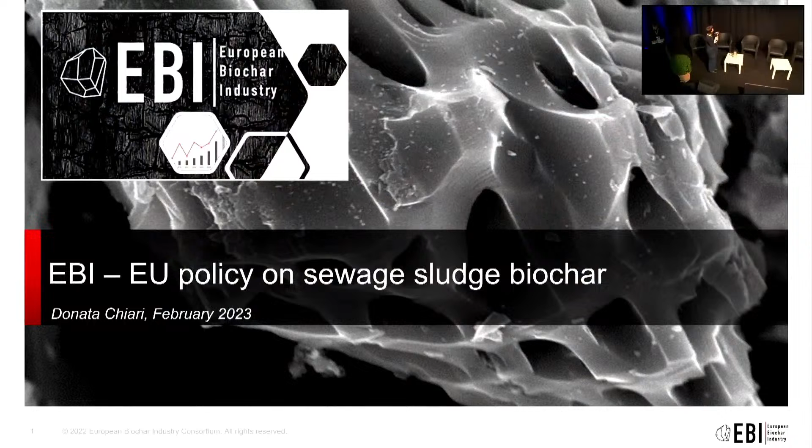So EBI has typically four pillars of activities: market intelligence, communication, industry standards, and policy. Policy arises as a key aspect for EBI work, and this focus on policy work is really to support the presence of biochar in the European policy framework.

Specifically today, of course, I'm going to talk about sewage sludge biochar, because one of our goals is to see this feedstock included for biochar in EU policies and initiatives. This is, of course, a waste stream that has been more and more discussed for its great value, and now it's one of the central themes of the EBI work on policy.

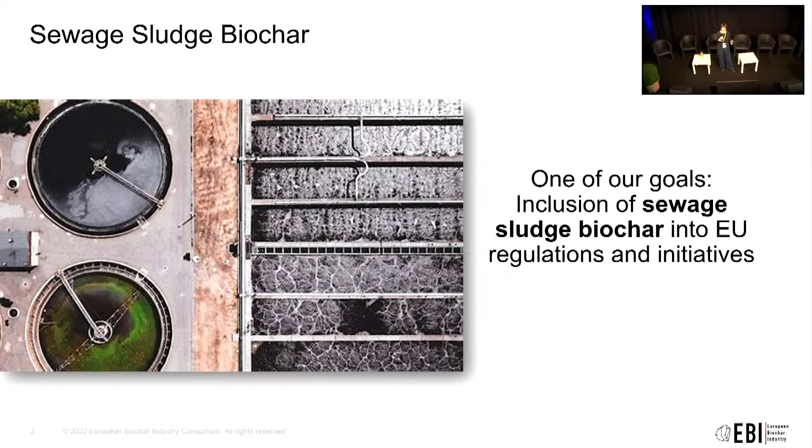So a little bit of background, what we already have on the table. When it comes to sewage sludge as a feedstock for biochar, we can count on many achievements. First of all, the scientific basis: literature and research from all over the world have been developing rapidly during the last years. And this also thanks to the high technology readiness level.

I don't know why it insists. It just wants me to get over this.

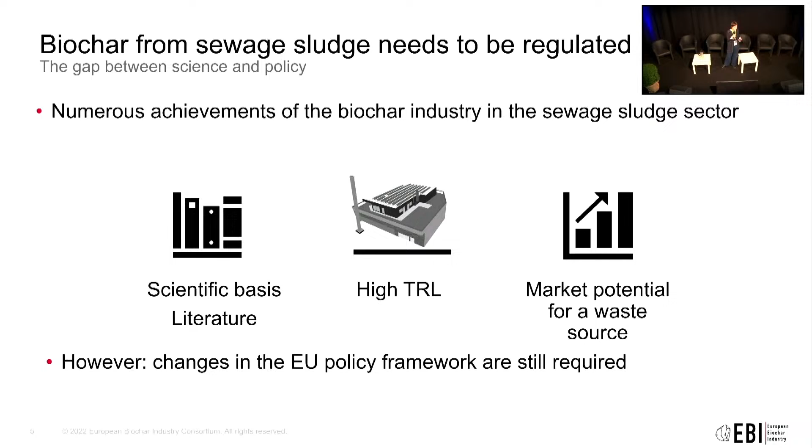And so also thanks to this high technology readiness level, we already have the market potential for a concerning waste source all over the world. But how European policies and initiatives will reflect this potential is still blurred. And this is where the EBI takes action.

So not everything, of course, is bad. We want to remind you that last year the Fertilizing Products Regulation included biochar into CMC 14, and different member state regulations are allowing sewage sludge biochar for land application. And also non-plant-based biochars are being discussed for a regulated land use.

So even though sewage sludge is not included in the positive list of feedstock for biochar, the discussion is definitely open. And the surrounding policies in the European Union are changing, talking about agriculture, nutrients, and urban wastewater treatment. We are really seeing the landscape changing, and this opens new opportunities and new space for intervention for biochar from sewage sludge.

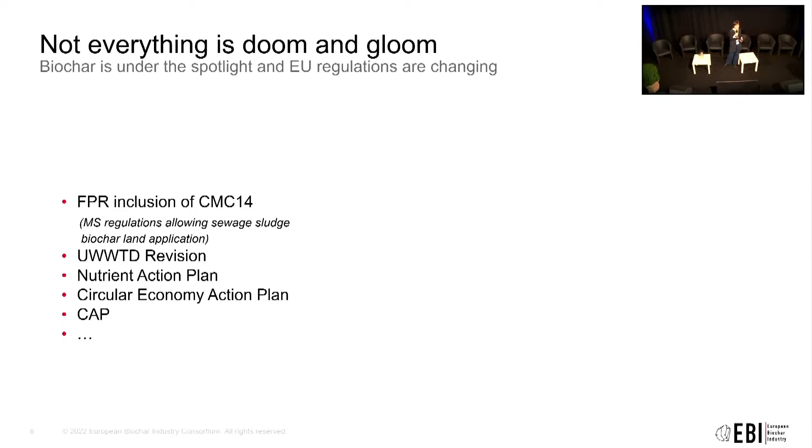So here I'm going to present very quickly some of the EBI activities. Our key word, of course, is cooperation. We collaborate with scientific institutes and universities. We continuously interact with our members through, for example, working groups. And we can count on cooperation with other platforms such as the European Sustainable Phosphorus Platform, which has been advocating for phosphorus recovery for many years now at the European level.

So, talking about our activities, we just released on the 31st of January of this year the position paper on...

This is really... okay, let's see if it's just my movement.

So here we have the updated position paper on sewage sludge biochar. This is a product of our working group on sewage sludge carbonization, and our call was specifically on the inclusion of biochar from sewage sludge into the FPR.

The main concern of the JRC when they published their evaluation was the safety of biochar, so pollutant removal. That's why this position paper, which you can download with the QR code before it changes again, summarizes some of the most recent literature on pollutant removal in sewage sludge biochar.

It also covers sewage sludge biochar properties as a P-fertilizer and as a carbon removal solution. You can find it here or on our website.

Lastly, I'd like to remind you how much the EBI is counting on communication to change the European policy framework, because communication and interaction with people leads to change, and policymakers need to know what is already there with biochar from sewage sludge and biochar in general. The more we tell this story about what is both a solution to many issues and a source of value for Europe, the more it will be heard.

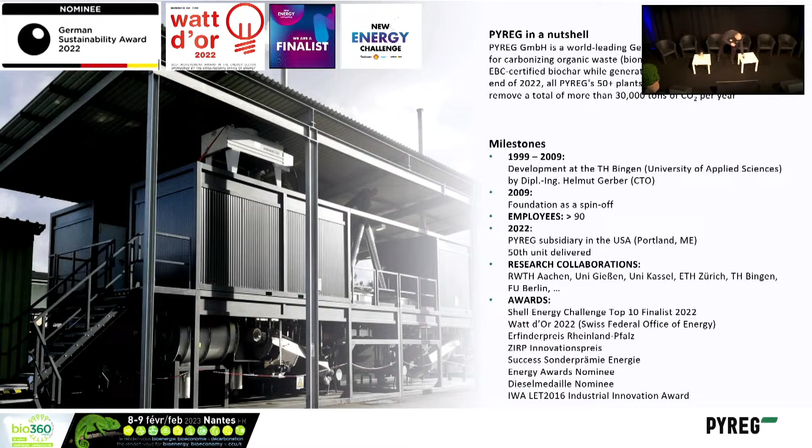Yeah, thank you, Harald. After just falling off the stage... Very short introduction into Pyreg. Let's try this. No...

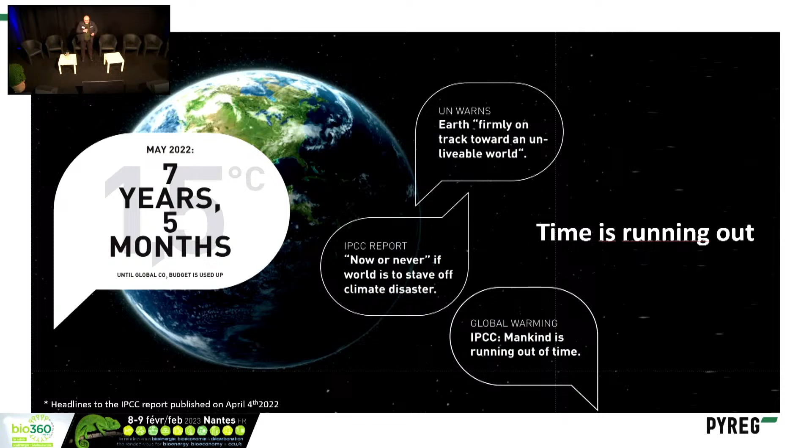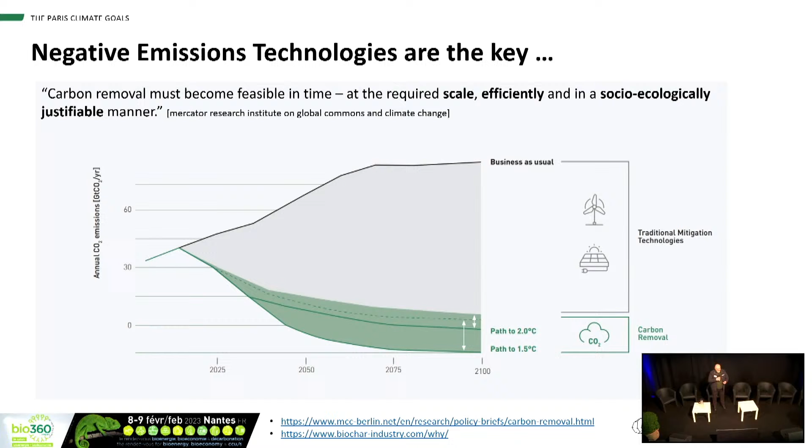I personally started in 1999 with gasification, switched to pyrolysis in 2003, did a lot of research at the university, and founded Pyreg out of this research project in 2009. We are almost 100 employees now, building machines on 3 continents. I think this is common knowledge: everyone knows we need carbon negative technologies to save carbon dioxide emissions by not burning fossil fuels. To reach the path to 1.5 degrees or even 2 degrees, we need carbon negative technologies, and biochar is one of them. There's direct air capture and so on, but biochar is now, in the last few years, accepted by the IPCC panel as carbon negative, and that's the area we work in.

The effect is the following: you have photosynthesis, so plants capture carbon dioxide, which becomes part of the plant as carbon. If you don't burn the plant but put it into a pyrolysis plant - any pyrolysis plant, not just a Pyreg plant - you create carbon. This carbon is very stable, permanent in the soil, and we'll hear more about this from Paal later, about the persistence of carbon in the soil. It's stable for more than 1,000 years. You can use it as a soil conditioner, or in building materials like concrete, where it's also obviously stable.

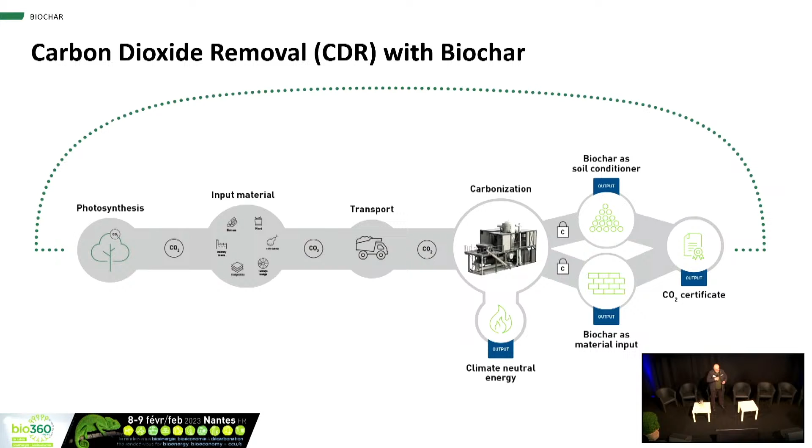If the material is used in soil, there are side effects related to carbon dioxide removal. This is a meta study led by Hans-Peter Schmidt, Claudia Kammann, and others, who reviewed 26 other studies - so this represents the grand mean of these studies. You can see there are many areas where biochar helps in soil, like crop yield, water use efficiency, and water holding capacity, plus some effects like nitrogen leaching. It's a very good material, traditionally used in soils to help poor soils achieve better yield.

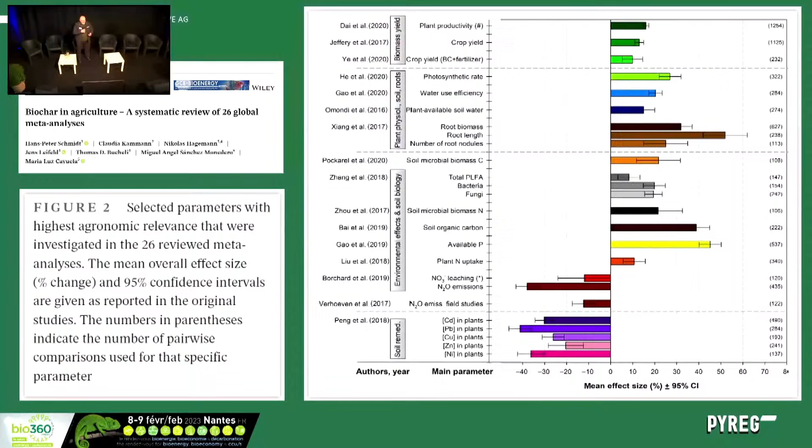Not all biochars are equal. You can change the biochar by changing the type, the temperature, time, residence time, and so on. And it's important, as was shown by EBI before, there are some parameters which are important to get results out of it.

If we switch to sewage sludge, the question is why sewage sludge? At the moment it's widely used in Europe for agriculture because of the phosphorus content. The reason is there will be a peak of phosphorus. Different studies talk about it being reached in the next 10 years, maybe by 2050, but there will be a peak of phosphorus production. And phosphorus sources are not endless, so we have to care about reusing and recycling it.

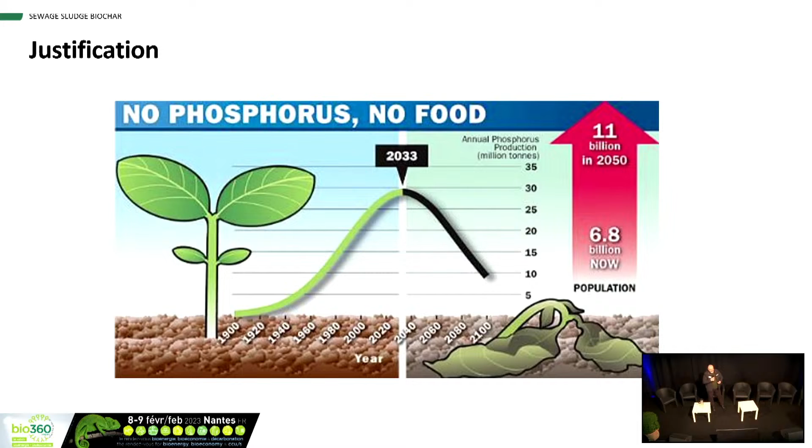You can already see the prices are going up. This is something I extracted from the internet: the phosphorus rock price from Morocco is just going up all the time. The reason is that the rest of this phosphorus can only be sourced in countries where, for political reasons, it's not really easy to get your hands on it. So we have to reuse and recycle phosphorus.

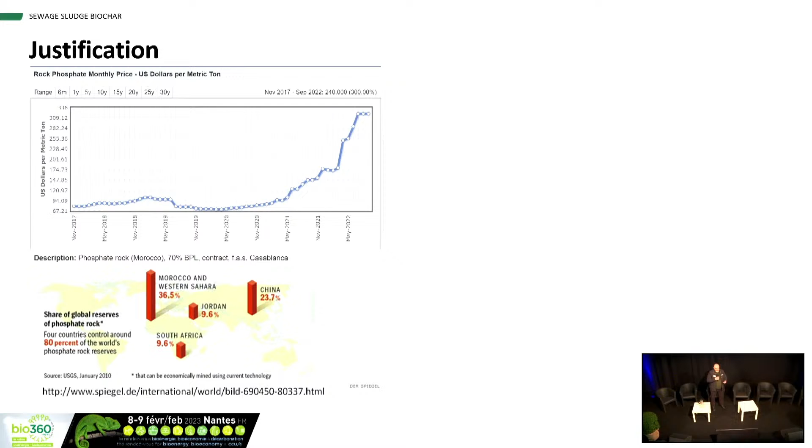If you put sewage sludge directly on the field, it may contain organic pollutants, microplastics, and so on, and that's maybe not the best way. I can show you that sewage sludge biochar may be one solution to make a better phosphorus product out of the sewage sludge.

This is the quality of sewage sludge in Germany, and I think it's the same in France and other European countries. Every time the question is about pollution, heavy metals are the main concern. We can see that heavy metals have been heavily reduced over the last 20 to 30 years in German sewage sludges. If we pick one contamination, that's cadmium.

If you compare the cadmium contamination between sewage sludge and phosphate rock from different countries, you can see sewage sludge contains around 1 milligram of cadmium per kilogram, while phosphate rock clearly contains more heavy metals. So the concern about heavy metals applied to sewage sludge alone isn't really fair, because alternatives contain more cadmium. So it's a good idea to use it — not the cadmium, but the sewage sludge.

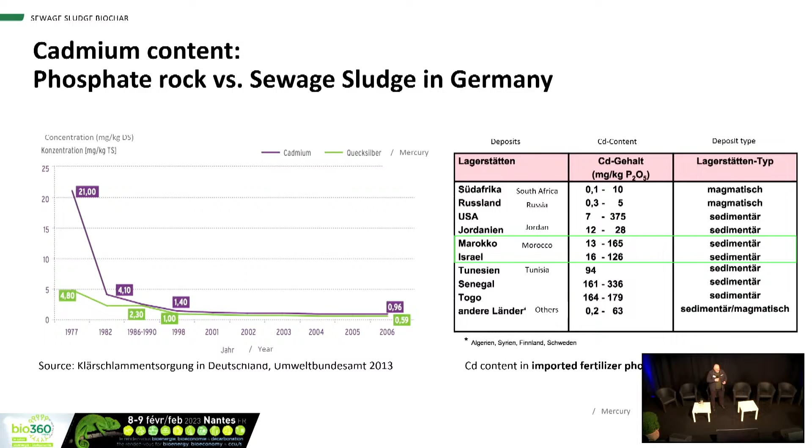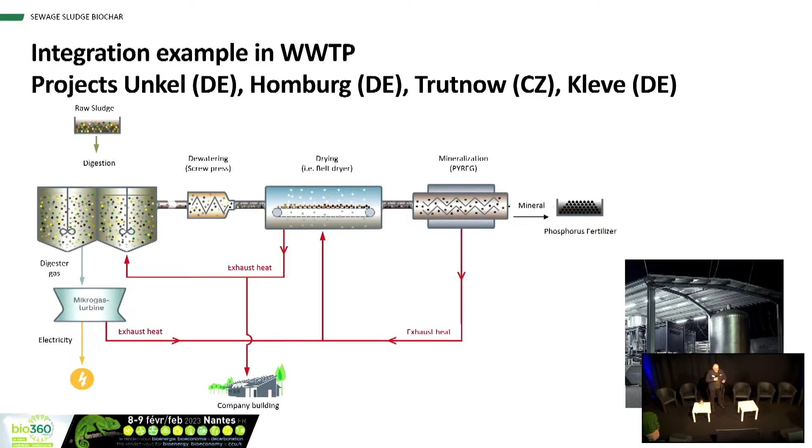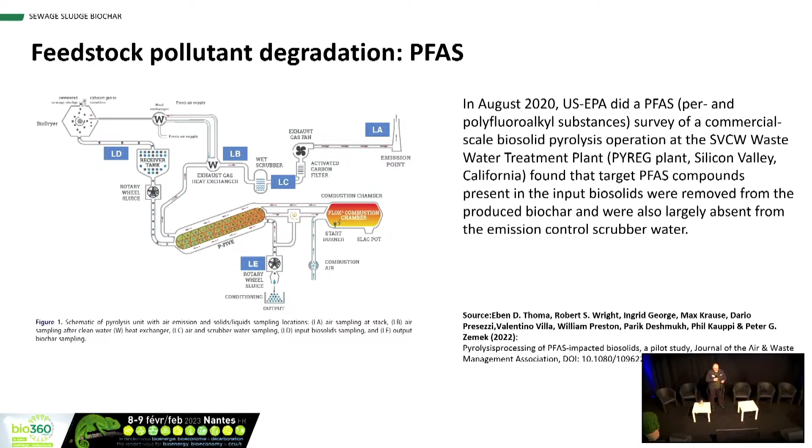Coming to pollutants, one important topic is PFAS — the per- and polyfluoroalkyl substances, a difficult word. We did research with our clients, mainly in the US, in Silicon Valley, at a wastewater treatment plant which runs a Pyreg. They were able to show that almost everything is gone. We'll also see new results from WOW, which Paal will show you later, showing that more than 90% of the PFAS is gone. It's not in the biochar, it's not in the exhaust gas — it's just converted to its elemental composition.

Then we have the PAHs. We did some research on PAH reduction with polluted biomass. We had a biomass which contained 5,300 milligrams of EPA 16 PAH, so highly polluted biomass. Put it into the machine, and we were able to reduce it to 1% of the initial PAH content. So you can clearly see that pyrolysis, if done right, does not create PAHs. It can reduce PAHs by converting them to elemental carbon and hydrocarbons, which are burned in a combustion chamber.

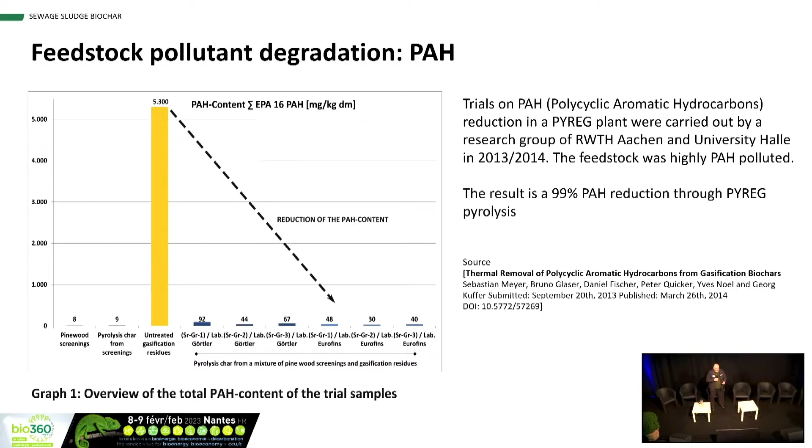Then we also did research together with the German EPA, the Umweltbundesamt, about pharmaceuticals. The research was done at a full-scale plant in Germany, in Unkel, 2019. And they were able to clearly show that all these pharmaceuticals were gone. They proved that they're in the sewage sludge, they're everywhere. But when the material enters the pyrolysis, the temperatures and the time just destroy these pharmaceuticals.

We also did research on dioxin. We took dioxin polluted biomass from the riverbanks of the river Elbe. This was former Eastern Germany. The soil there in the banks of the river is highly polluted with dioxin, and the biomass also. We took this biomass, which had a soil pollution about 250 nanograms per kilogram, and the dioxin after pyrolysis was reduced by 95%. Also for the same reason: treatment with temperature and time. This organic pollutant is destroyed.

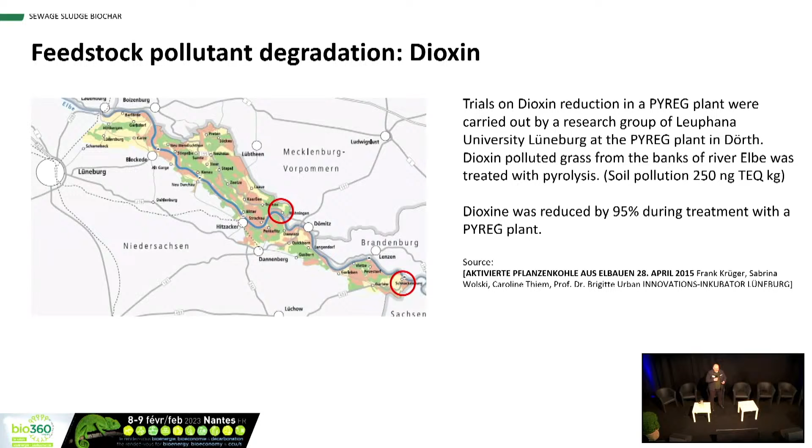Then we have again the topic cadmium, which is also very important. We can see that higher reactor temperatures evaporate the cadmium. So if the temperature is higher than 500 degrees, cadmium will be evaporated in the pyrolysis gas, pass the combustion chamber, and you have to filter it out later with an activated carbon filter, which we do. The problem is usually the higher the temperature gets, the more unavailable the phosphorus gets for the plants.

And this you can see in the columns. We have different temperatures: 500, 600, 700 degrees. And the hotter the phosphorus gets in the pyrolysis, compared to triple superphosphate fertilizers, the lower the availability for the plant is. So there's a trade-off. It's not best to make it as hot as you can, because you lose phosphorus availability. And usually you do not need these high temperatures to get your cadmium content below the limits of the European fertilizer legislation.

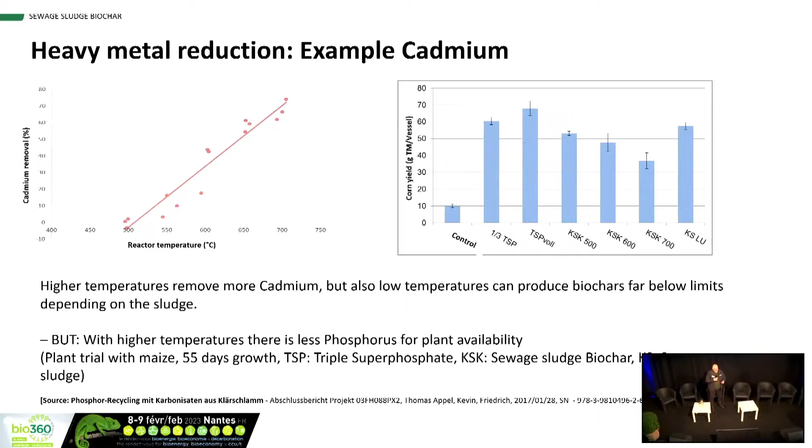The last fertilization trials we did were last year. They were run by the state of Hessen in Germany. You can see that if you compare the carbonisate made from sewage sludge to triple superphosphate, which is the standard for fertilization, it's in the same area. So it's like 90% of the value of the fertilizer you can buy, and the prices are highly different, because fertilizer at the moment sells around 600 euros a ton, and we are talking about a material which you can get almost for free because it's traded as waste.

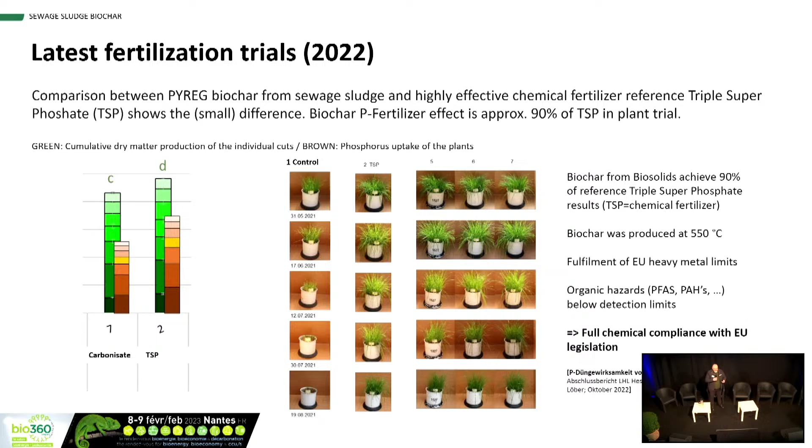My conclusion for sewage sludge biochar, after doing plant trials and so on starting 2008: in no instance did municipal sewage sludge exceed the limits of German fertilizer legislation. It's very easy - if you see the sewage sludge and know the mass conversion of the different materials, and have an analysis of the sewage sludge, you can directly tell people whether it will hold the limits of the fertilizer legislation or not, and in most cases it will hold the limits.

Sewage sludge has a significant phosphate fertilizing effect if the temperature is not too high. In our experience, below 700 degrees and higher than 500 degrees, which is needed to destroy organic pollutants, is a good temperature. And there's the conflict between phosphorus availability and cadmium reduction. So if there is a lot of cadmium in the sludge, you might want a higher temperature, but you have to think about the availability of the phosphate going down.

One thing is very obvious: nitrogen is lost during pyrolysis. Not everything, but up to 60-80% of nitrogen is lost. In some cases this is an advantage because, especially in northern Germany, Netherlands and so on, there are high nitrogen pools and they have problems with nitrogen. The ratio between phosphorus content and heavy metals stays the same. So if you put sewage sludge on a field, or carbonisate on a field, you don't put more heavy metals anywhere.

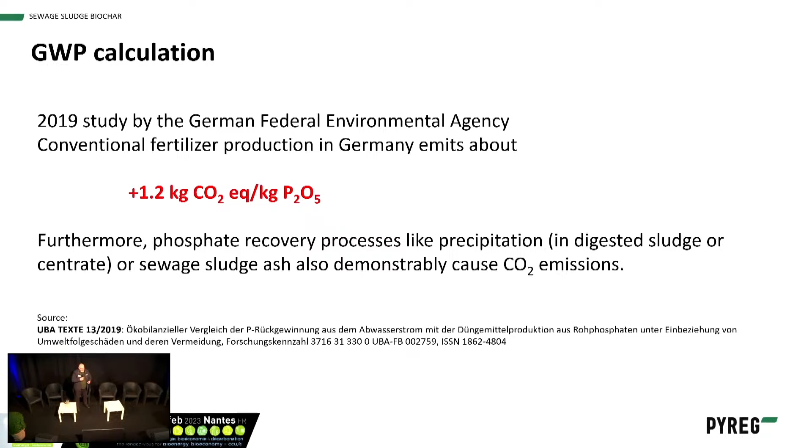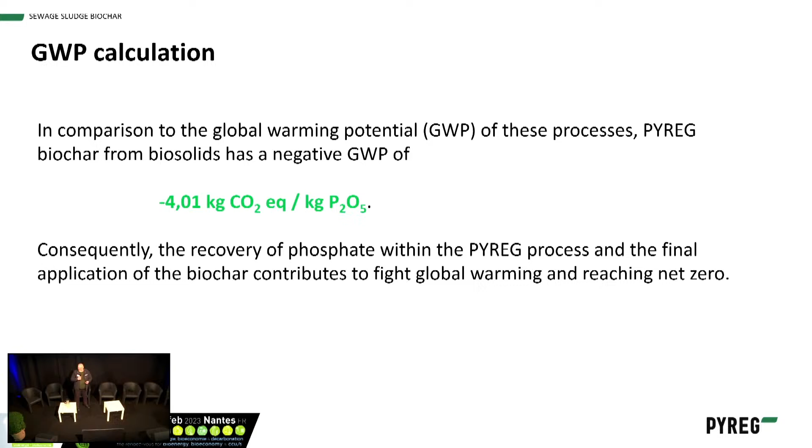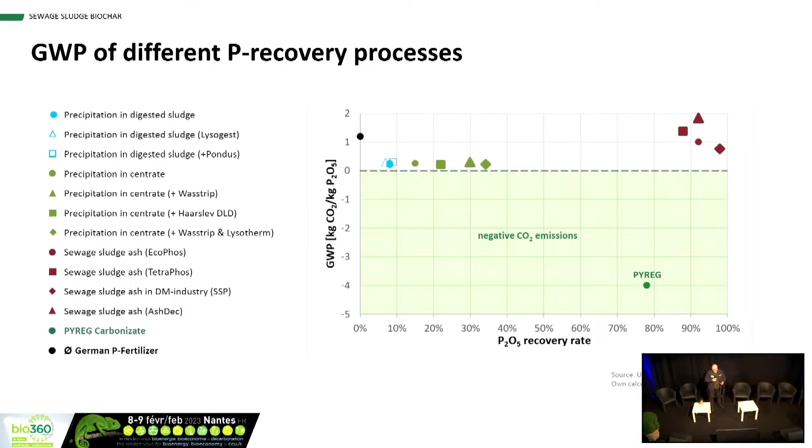I try not to fall off the stage now. There's stairs. As it is all black, we didn't see that there are stairs.

So thanks a lot, Helmut. That was a wonderful presentation. I think it also showed the scope of what we're working on regarding this topic, from elimination of pollutants, because we're using sewage sludge on fields now just as a pure product. So we can handle the problematic issues of it. Through carbonization, we have full chemical compliance with fertilizing products regulations, which I think is interesting, just because it's made from sewage sludge and people don't really get the chemical transformation of this material. It is an issue that has to be discussed quite intensively. And we also saw the carbon balance, which is super attractive.

So we've seen this from one technology now. Now I would like to invite Christian Wied from AquaGreen on stage. They're also here present, and they have a bit newer technology, a more recent tech company, and they're also working on a very interesting system of sewage sludge carbonization. Thank you, Christian. Thank you. So I will focus on PFAS removal and sludge management by our new fully automated sludge drying and pyrolysis system.

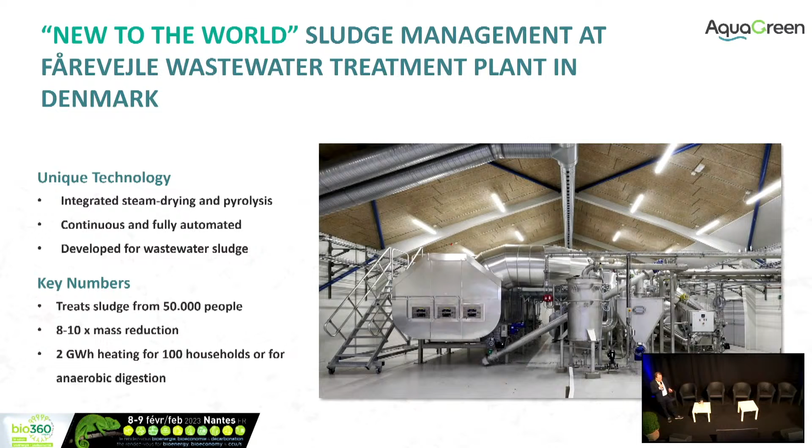The flue gas from the incineration is heating the pyrolysis, and we also use the flue gas for heating the dryer. And in the end, we recover around 70–80% of the heat as hot water because we condense the steam that is generated from the sludge, all in a continuous process. The system is treating sludge from around 50,000 people, so it's very well suited for mid-size wastewater treatment plants. We are not covering million-inhabitant cities, but we are covering roughly 50% of all wastewater treatment plants in Europe. You have an 8 to 10 times mass reduction, so you are saving a lot on sludge handling cost. And with the system here, we are generating 2 gigawatt hours of hot water annually.

Will you turn on the video? So we'll just show a short video from the system in operation in Denmark.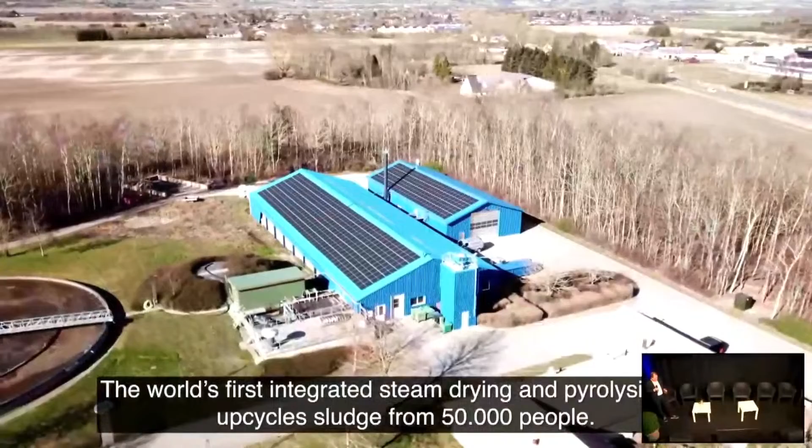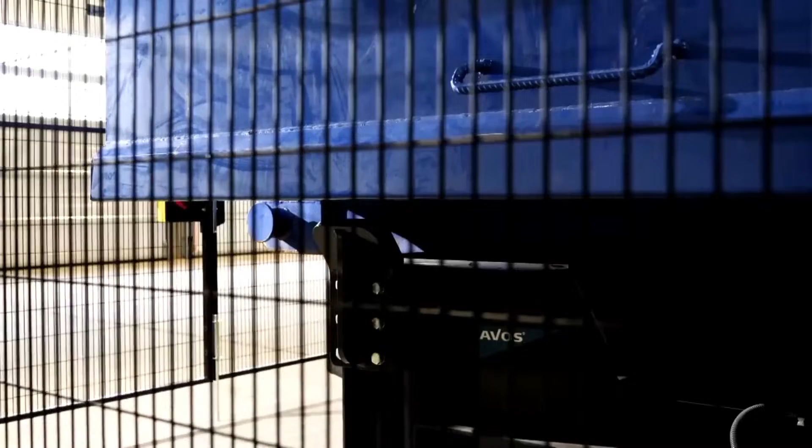Fårevejle wastewater treatment plant is located in beautiful Odsherred, northwest of Copenhagen. The world's first integrated steam drying and pyrolysis plant upcycles sludge from 50,000 people. The plant converts sewage sludge into biochar and district heating. It protects the groundwater as harmful pollutants are removed. The plant protects the climate as biochar captures and stores CO2. The container empties the sludge onto a conveyor.

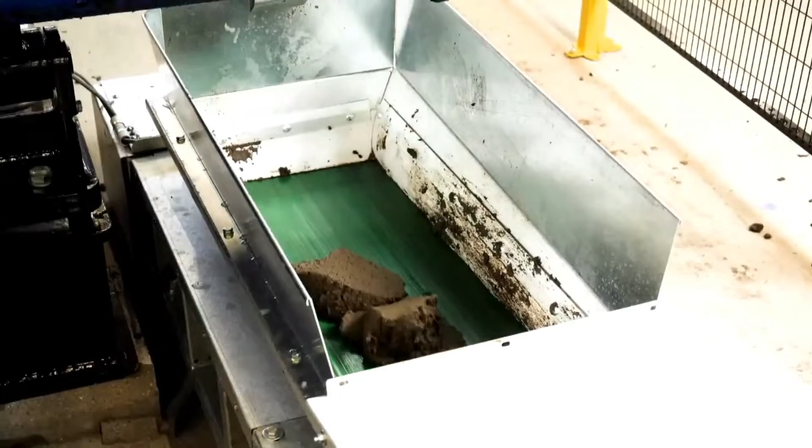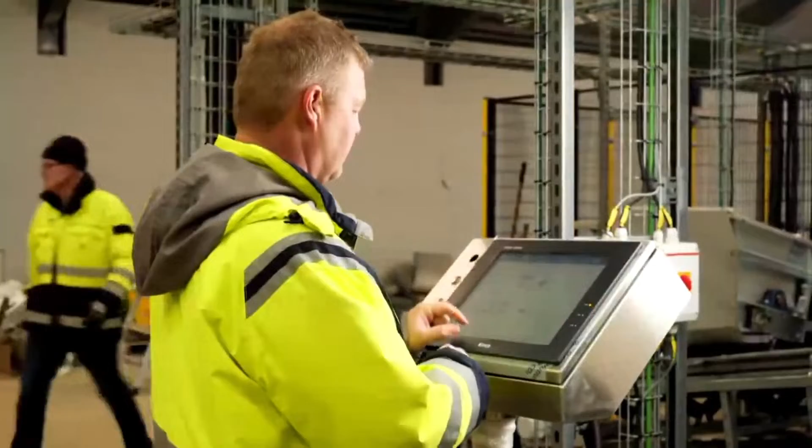The sewage sludge contains 75% water when it is loaded into the steam dryer. After 2 hours, by use of superheated steam at 200 degrees Celsius, nearly all water has evaporated. The dried sludge is conveyed to the pyrolysis in a closed and fully integrated process. The energy from the sludge is regained.

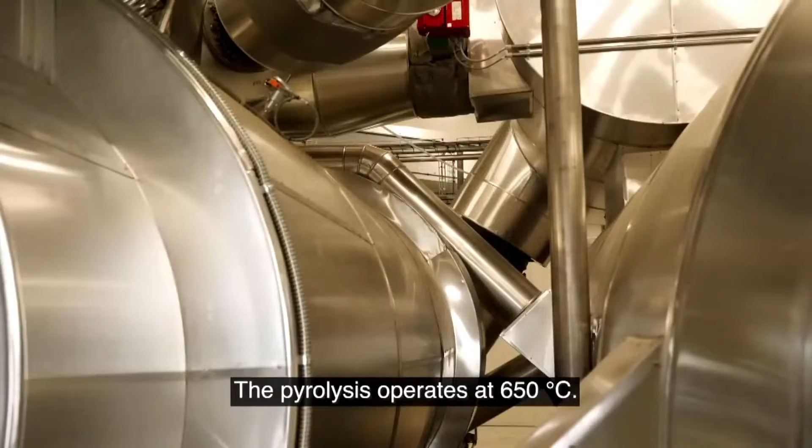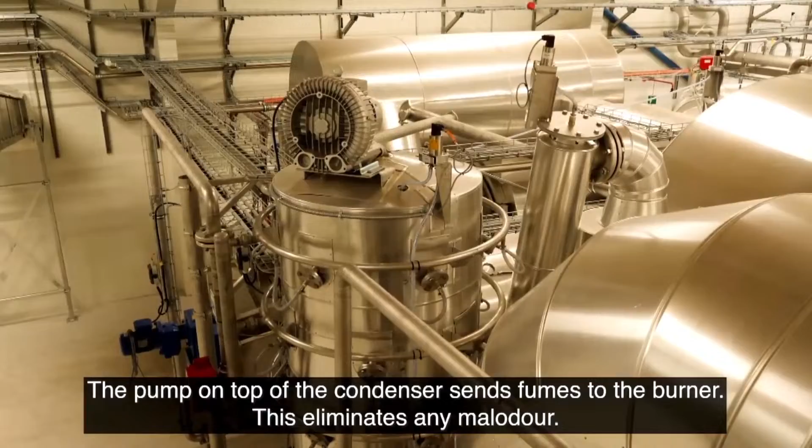First, it is used for the pyrolysis process, then for the steam drying process, and last, for local or district heating. The pyrolysis operates at 650 degrees Celsius. The flue gas is cleaned in a scrubber. The pump on top of the condenser sends fumes to the burner. This eliminates any malodor. In the burner, pyrolysis gases are incinerated at 900 to 1000 degrees Celsius.

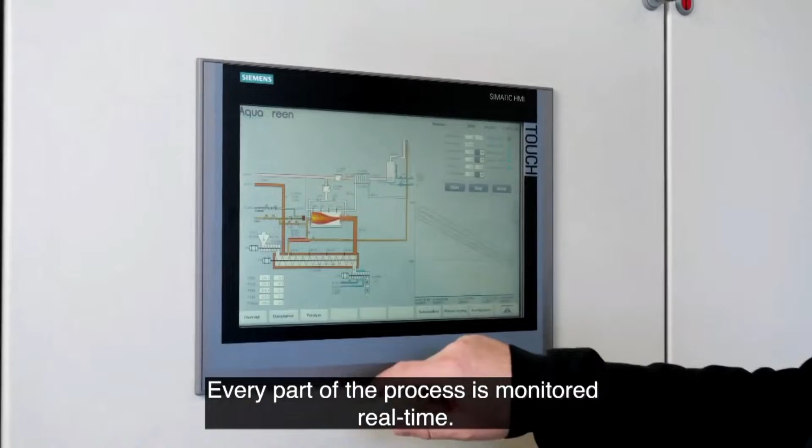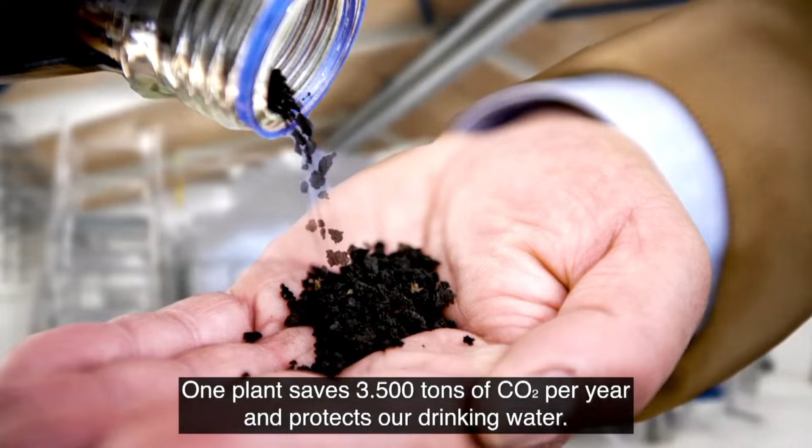The plant is fully automated. Every part of the process is monitored real-time. The hygienized, odorless biochar contains around 30% carbon and 6% phosphorus. Harmful pollutants like PFAS, medical residues, and PAH compounds are eliminated. One plant saves 3,500 tons of CO2 per year and protects our drinking water. The AquaGreen Hekla technology, sustainable biomass treatment for a greener future.

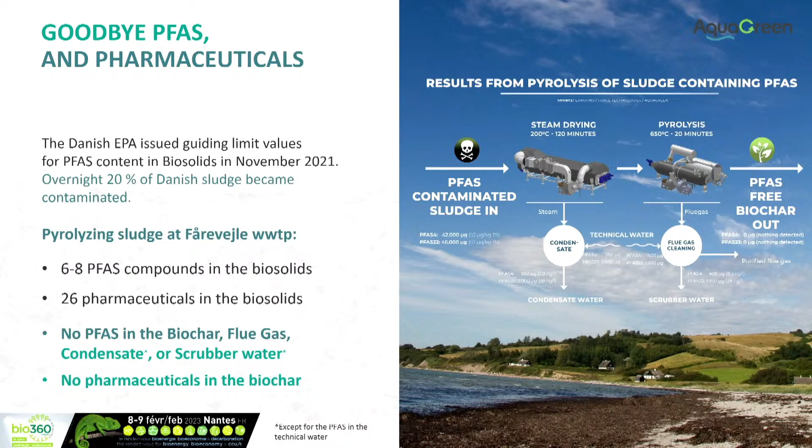In the same manner, we also see that we eliminate all the pharmaceuticals we can measure, also the pesticides we see in the sludge, as well as, for example, PAH compounds are all not detected in the biochar. So we have a system which is extremely efficient in removing all organic pollutants, and we should have a green pathway for getting it approved as a fertilizer, we believe.

From a climate point of view, it's clear we store the carbon in the biochar. In our plant's perspective, we store around 500 tons of CO2 in the biochar. But on top of that, we're actually also eliminating the CO2 emissions from the sludge. It's typically today stored for 6 months and then applied on farmland. And when we look at the LCA done by the Technical University in Denmark, we can see that we are saving around 2,000 tons of CO2 emissions pyrolyzing the sludge instead of spreading it on farmlands.

On top of that, the 2 gigawatt hours of hot water that we generate can be used for local heating for the anaerobic digestion, can be used for district heating. That is also replacing up to 1,500 tons of CO2 if you compare to heating with fossil fuels. And we also reduce the transportation around 10 times when we look at reducing the sludge volume to the biochar.

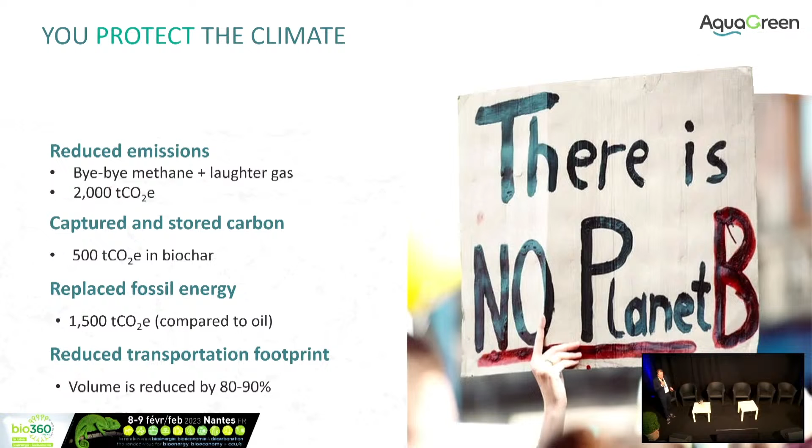From a cost point of view, this is actually an application which is very advantageous. The sludge handling cost in Europe today varies between 50 to 200 euro per ton. Once we are at around 50 euro per ton or higher, we have a positive business case on top of the environmental and climate benefits. So with this system, we are typically looking at a return of investment from 3 to 7 years.

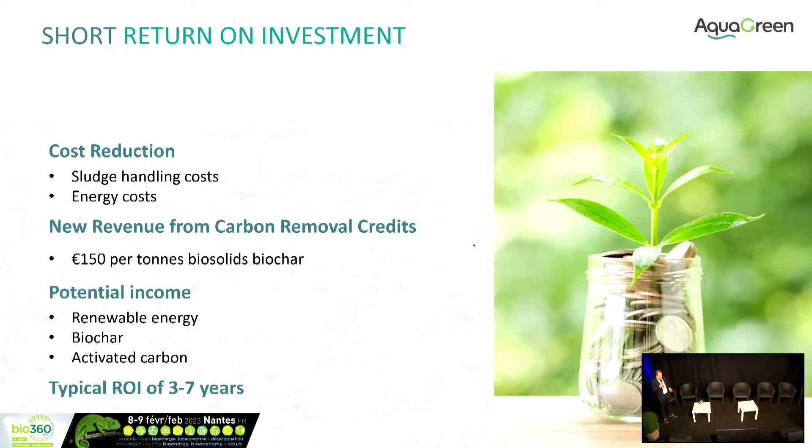We have various incomes that are not seen before. We save on the sludge handling, but we also get new income from the carbon removal credits from the biochar, and we get new income from selling the biochar, as well as potentially selling the heat for district heating. In Denmark now, the biosolids biochar is sold at 100 euro per ton, and that is because the biochar is seen as a valuable resource.

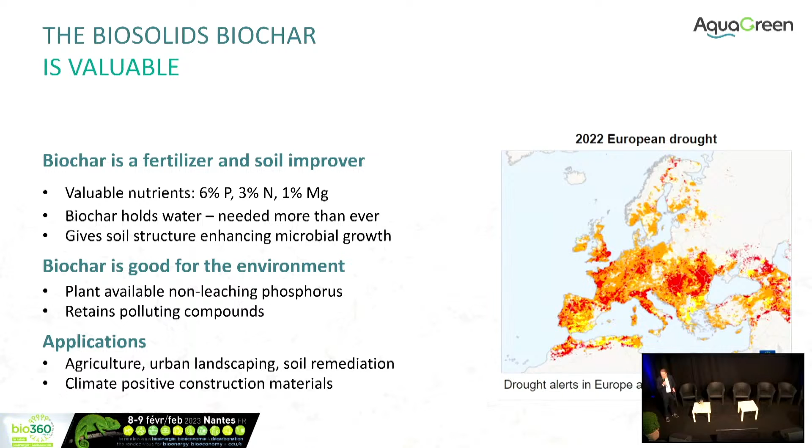On top of what Helmut showed on the phosphorus fertilizer perspective, the water holding capacity is also hugely important, if you consider the drought we had in Europe this past year. So in Denmark we have been able to convince the authorities, the Danish EPA, that biosolids biochar can be applied to soil as long as we meet the requirement that we pyrolyze at 500 degrees C or above for more than 3 minutes.

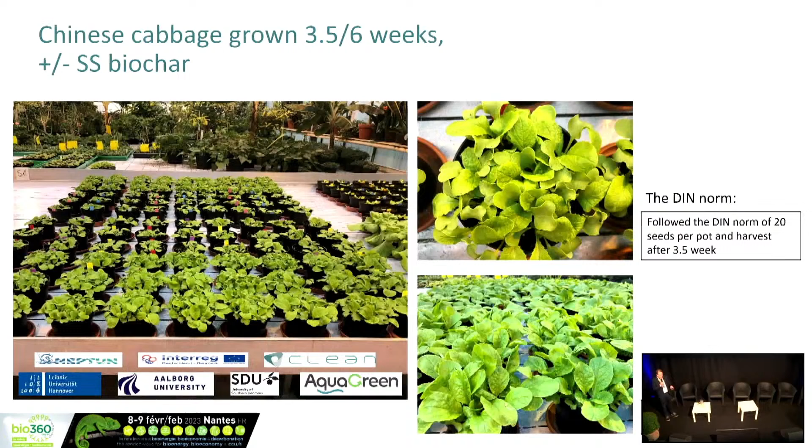Then the Danish EPA accepts the documentation, the scientific evidence that the organic contaminants are removed. And having that, then we have an excellent fertilizer or an excellent soil improver. And here, on top of, you could say, the 30 trials that Pyreg has done, I just show you a short example of results on the water holding capacity.

So if you take these Chinese cabbage pot trials, if you add from 0 to 3% biochar in the soil, you're tripling the soil water content. So we go from having a soil with 10% water to a soil with 30% water by adding 3% biosolids biochar to the soil. And this really has, you could say, a huge potential when we're looking at water-depleted soils under drought conditions.

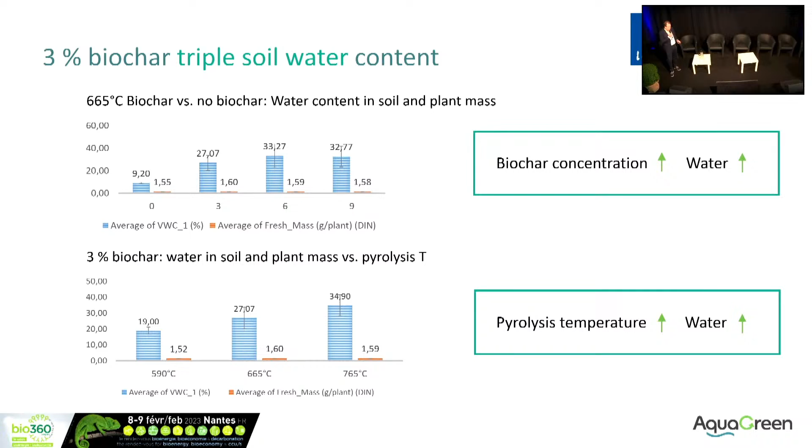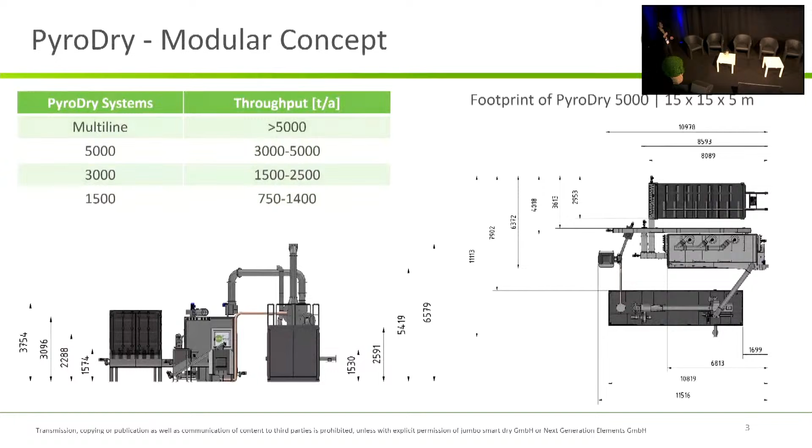In the next slides, I will show you some examples of different plants. Here you see the PyroDry 3000. It was our first plant which was constructed. It is a line concept where we have the drying unit and then going in one line to the pyrolysis unit. This construction can be installed according to how much space you have in your wastewater treatment plant.

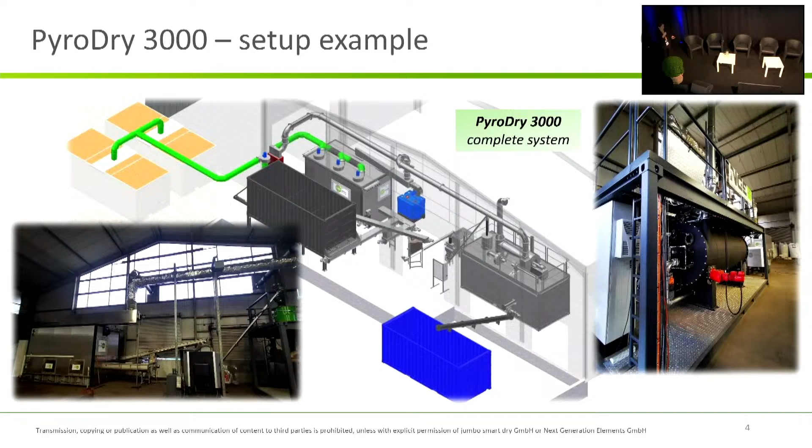There are two more examples. On the left-hand side, we have a double-line PyroDry 3000 for handling 10,000 tons of sewage sludge per year. And right now, we are engineering a multi-line system where we are able to handle 30,000 to 35,000 tons per year. And there we are installing 6 drying units with 4 pyrolysis units.

So I just pick out some of the highlights of our system. We have really complete treatment, drying and thermal treatment of dewatered sewage sludge to an intermediate or final product in the most compact, fully automatic and energy efficient form. It is a modular design.

We are able to utilize the process engineering synergies in the area of exhaust air purification. The dryer simultaneously functions as a flue gas purifier with chemical separation of SO2 by reaction with existing NH3 from the drying process. As we already heard from our partners, we are able to remove PAH or PFAS. And now I want to focus my talk on microplastics.

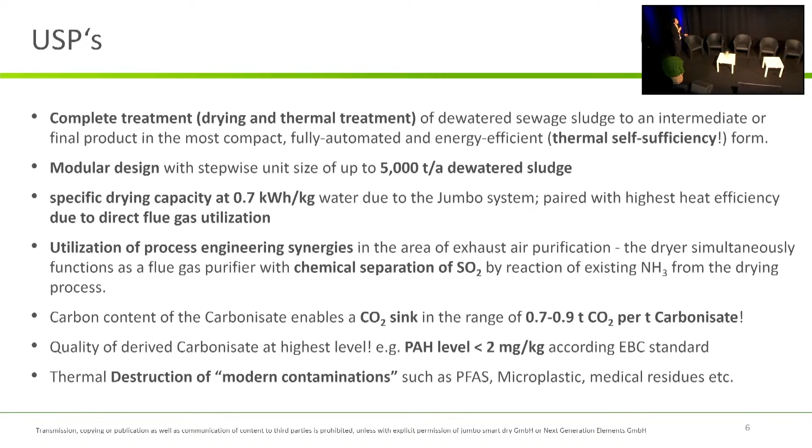Before we can speak about the removal of microplastics, we have to think about how many microplastics we will find in the sewage sludge. For that, I will reference a study from the Austrian Federal Environmental Agency. There they looked at 35 wastewater treatment plants with different sizes, from 5,000 to 500,000 people equivalent. Different analysis methods were used, but for me, the biggest fact is that we can find nearly 85,000 pieces of microplastic in 1 kilogram of sewage sludge. And they have a size of 0.05 to 1 millimeter per piece.

What will be the factors of microplastic in the sewage sludge? Of course, we have different sizes of wastewater treatment plants. We have different locations. We have, on the one hand, the treatment plants from the cities, and on the other hand, from the countrysides. And what they said in the study, the most influencing factor is the surrounding industry, like the recycling industry, the food packaging industry, and also the chemical industry.

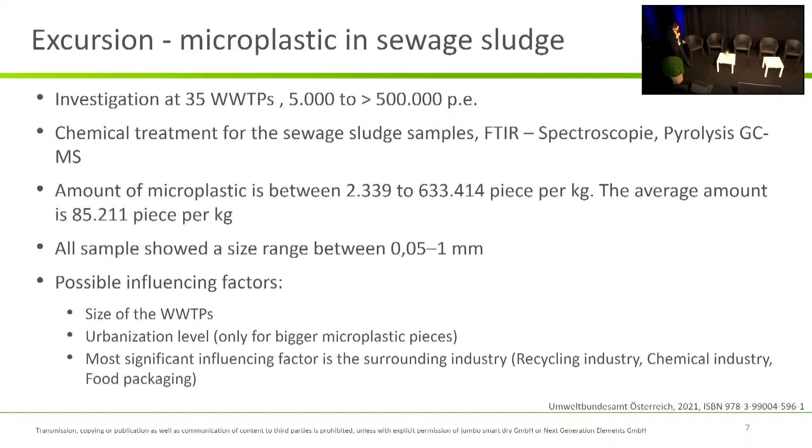In the sewage sludge, the most common plastic types were found, like polyethylene, polypropylene, PET, polyurethane, and polystyrene. And you can find in much literature that it will be removed at a temperature higher than 500 degrees. Just to tell you why I can say that, we are also doing pyrolysis for plastic residues, and there we see that at a temperature of 400 degrees, the plastic is going into the gas phase easily.

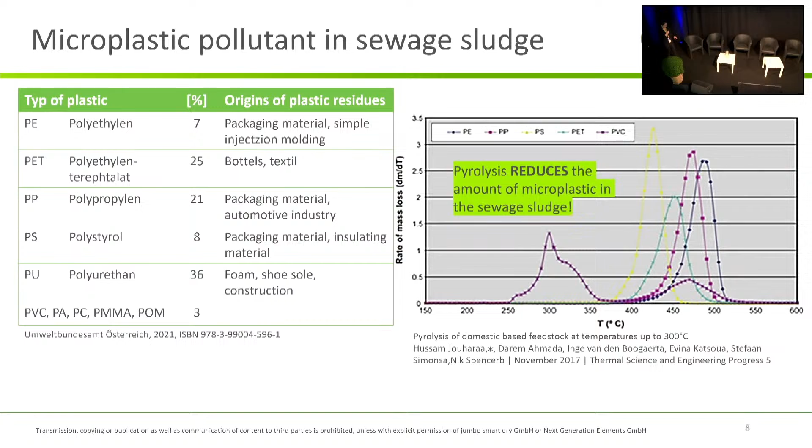Thanks a lot, Daniela. So now we've kind of completed the picture of pollutants, or does anybody know of others that we didn't mention yet? Okay, happy about that at least. We also saw that there are modular systems. We have smaller units, which Daniela presented. We have the intermediate ones, scalable also in different directions. And now I would like to invite Paal Nilsen from Vow, just behind there, to show us how we can scale into the larger direction and with different types of systems. And he will also elaborate.

Oh, yeah. Okay, thank you, Harald. On other topics, yeah, like climate and also elimination of certain pollutants. All the good stuff about biochar, I guess.

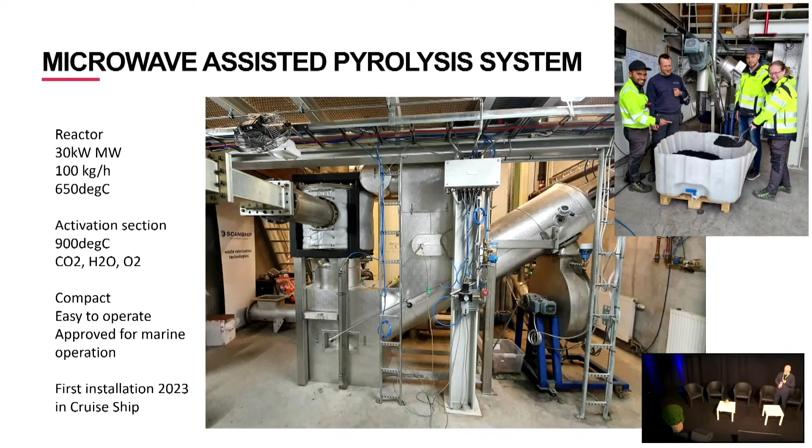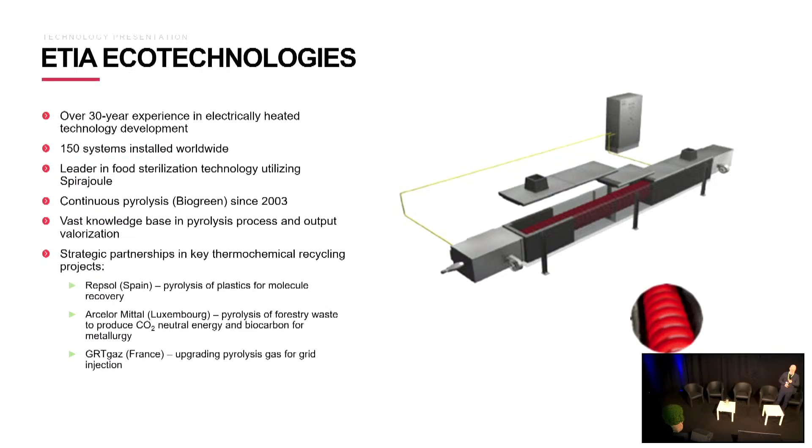The French technology that we pursue is the BioGreen system, which is an electrically heated screw conveyor that has very precise and good process control. We are able to really control the process accurately and produce beautiful biochars with this. So this has wide applications. Come to some examples. And Eric Pellerin will also talk about this technology specifically tomorrow regarding circular economy.

So the new machine we are building now is a rotary drum machine. This machine would typically take 100 ton dry solids a day. So it will produce some 8,000 ton of biochar per year per machine. You can see the guys there in the workshop. We have a workshop in Fredrikstad, south of Oslo, where we put this together.

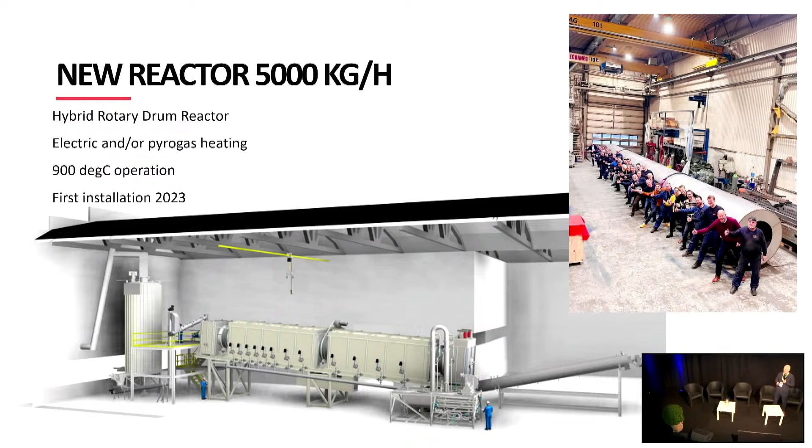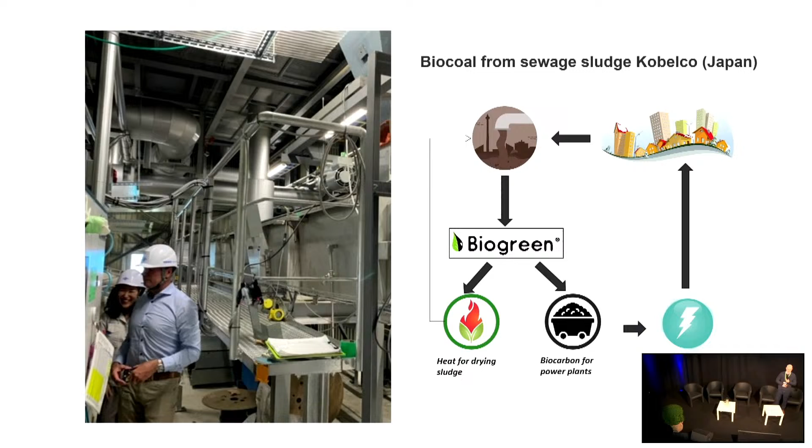So to sewage sludge, ETIA and the BioGreen system has been in operation in Japan for many years now, together with Kobelco. We have worked on sewage sludge there as a fuel for the coal-fired power plants. But after some pretty heavy approval processes, I'm happy to say that the Japanese Sewage Works Agency has finally approved our technology for use in Japan for sewage sludge, and they even promote it on their homepage. So that's good news for us. It's long, heavy work, and now we are developing more projects in Japan, since they also come to realize that phosphorus is a precious material they need to recycle and not only combust.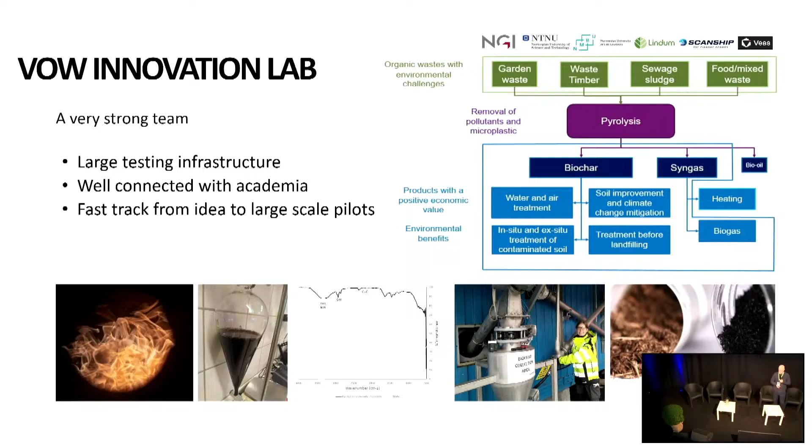We have a test rig where we have done a lot of exciting tests. And today I will just complement the previous speakers with some of our latest results on the overall mass balances of PFAS through the pyrolysis. I think by now everyone agrees that pyrolysis could destroy PFAS, but it must be done right. And I'm not sure 3 minutes and 500 degrees, as Danish authorities say, is always good enough. But this is typically what we can get. And I'm happy to see some PFAS in the residues rather than zero, because then I don't trust the measuring techniques. So there are some traces, both in the char and in the flue gas and so on, but they are controllable and small. And if we process them the right way, we have control.

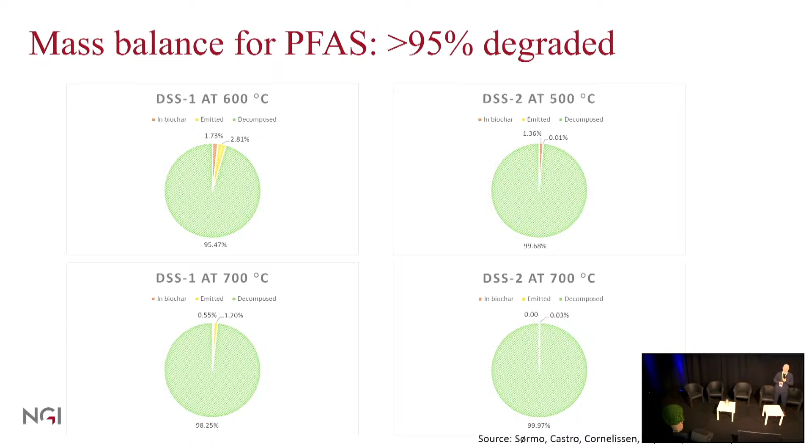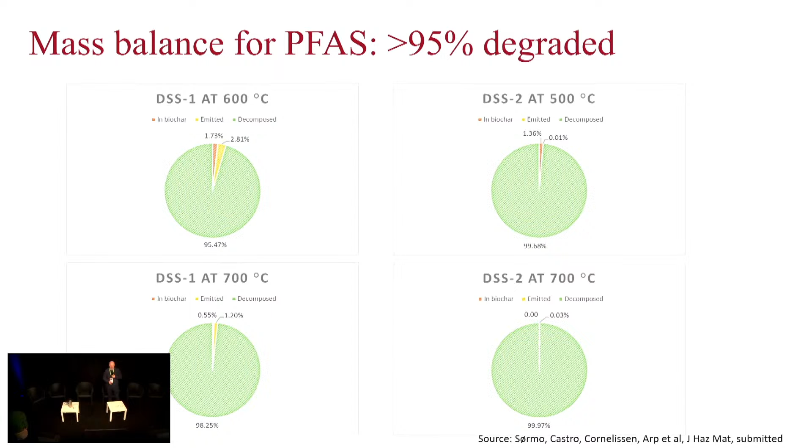Another interesting topic is also to make the biochar a sorbent for the same pollutant that you eliminate. And this is an example where we took sludge from the local wastewater treatment plant at Oslo Airport. That is one of the sludges with the highest PFAS contents in Norway. And we made a pyrolysis out of it. And as you could see from the previous slide, this biochar has eliminated all the PFAS there. But we blend 1% of that biochar from the sewage sludge works at the airport with the soil in the vicinity of that wastewater treatment plant, because the soil is very polluted with PFAS from firefighting foams and what have you.

So we brought 1% of the char from the sewage sludge into the soil from the Oslo airport, and then we measured the leachate of PFAS from that soil. And the good story, otherwise I wouldn't tell it, is that if you have the right char and you process it right, you could almost eliminate all leaching of PFAS from the PFAS contaminated soil in question. So this shows activated biochar, which is the best, but sludge number 3 is actually the biochar from the sludge from the wastewater treatment plant. And we could eliminate up to 98% of the PFAS, depending on the molecular size of the PFAS components and so on. But it is comparable to the activated biochars.

Very promising, and this is with as little as 1% blend into this. So we have a story to tell the local wastewater treatment plant there.

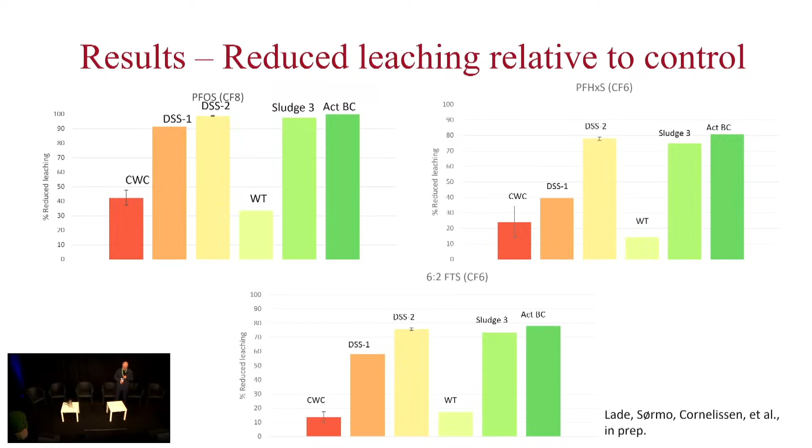Yesterday, this is just out of the press: the countries Denmark, Sweden, Norway, the Netherlands, and Germany joined forces in the EU and put forward a system announced at Reuters yesterday to ban PFAS altogether. Why? Because it's a forever chemical that comes with a lot of health costs. I read an article about associated health costs in the US due to PFAS equal to some $5 billion a year, all sorts of diseases you could get from that. So to eliminate it with one end-of-waste process like pyrolysis, I think is crucial.

So to do pyrolysis with AD, I think it makes sense to combine it with anaerobic digestion. Most wastewater treatment plants do biosolids reduction through anaerobic digestion.

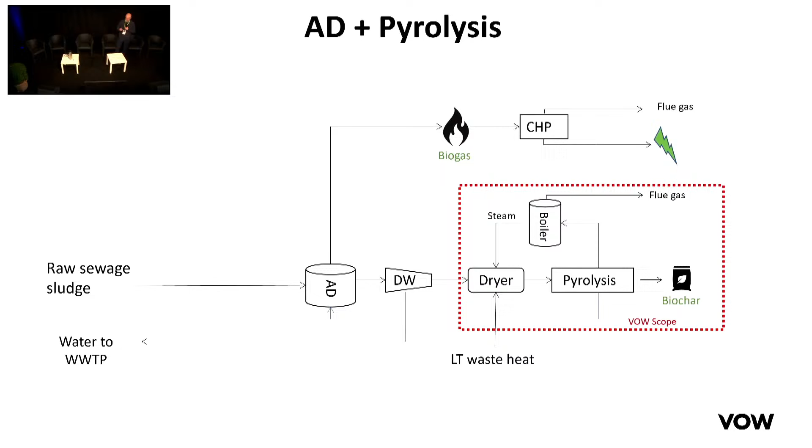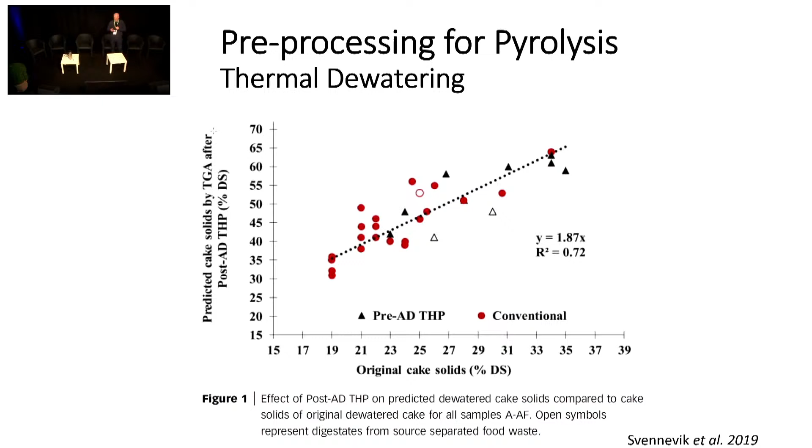What we have seen is that to pyrolyze, we need to dry, and to dry we need to remove water. We can remove water more efficiently by doing thermal hydrolysis. We cook the sludge to elevated temperatures and then dewater at high temperature. This is some different sludges where we've treated the sludge at 170 degrees and done some thermal disintegration with steam explosion, then dewatered it. You could see we could almost double the dry solids in the sludge after this process.

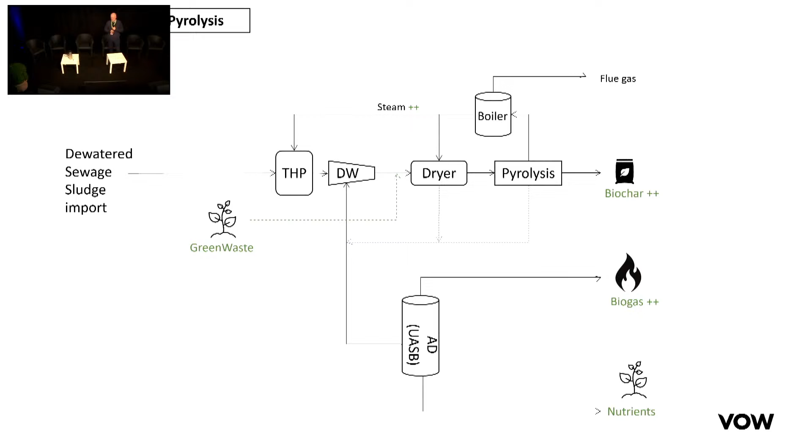So this is our take on how we could do energy efficient processes with pyrolysis in the future. And as Helmut says, some of the nitrogen is removed. We could capture some of it in the condensate and bring it also for digestion, into a nutrient-sterilized or pathogen-free type of flow.

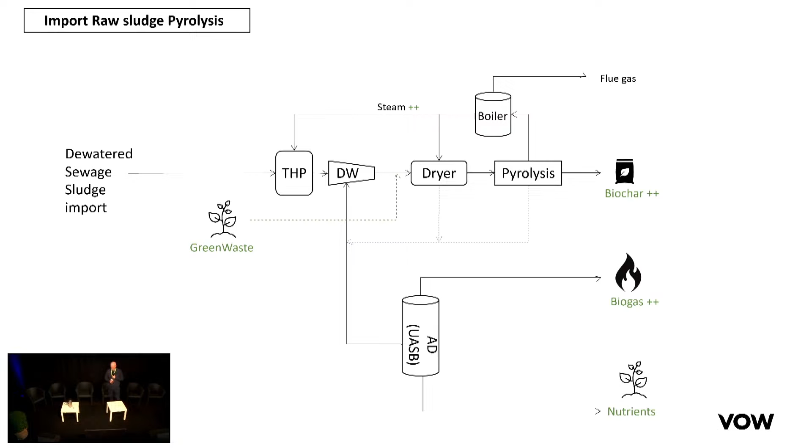So we are doing all sorts of anaerobic digestion tests with the pyrolysis condensates to see how we convert them also to methane. Gudny has shown that adding the amount of condensate coming out of the pyrolysis of sewage sludge back to the digester, we can get the same methanization as for the original sludge, which is a good thing.

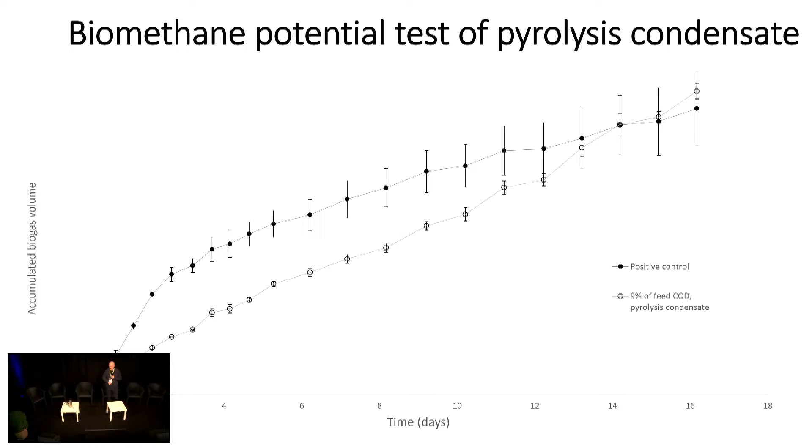And then, of course, we plan with industrial partners now to look at much bigger projects for the metallurgic industry, for the thermal energy needed for industrial processes. These machines, as I said, could do 8,000 tons of biocarbon a year each, and we are looking now at projects like this.

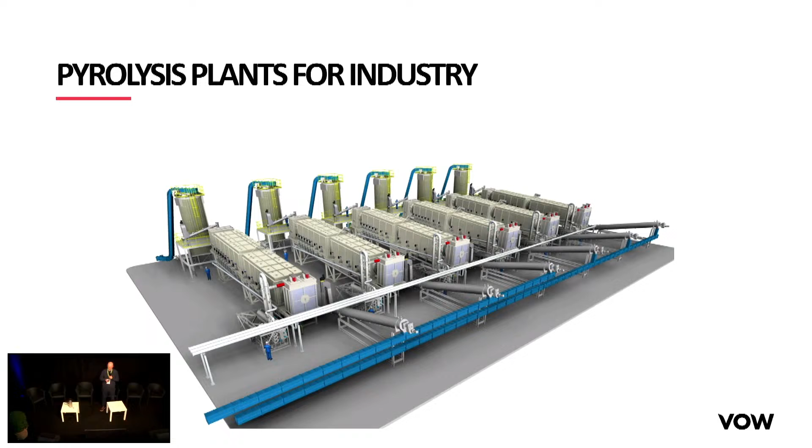I will end my talk with a small quiz, on permanence of biochar. EBI with Harald has made an effort to document the permanence of biochar—100 years, 1,000 years, 2,000 years, whatever, but maybe it's even more. There have been studies that will be published at Helsingborg Biochar Summit with all the details on the permanence of biochar, which is very optimistic for our community. And then the question would be...

Which is 2 weeks old and which is 290 million years old? The oldest is a biocarbon found in the crust of the soil in Australia. The carbon is the same, the structure is the same, so why shouldn't the permanence be the same? And if you get the right answer, I think I have a prize, which is about 290 million years of permanence.

Okay, Harald will judge who is counting right. Okay, see you in Helsingborg. Thank you.

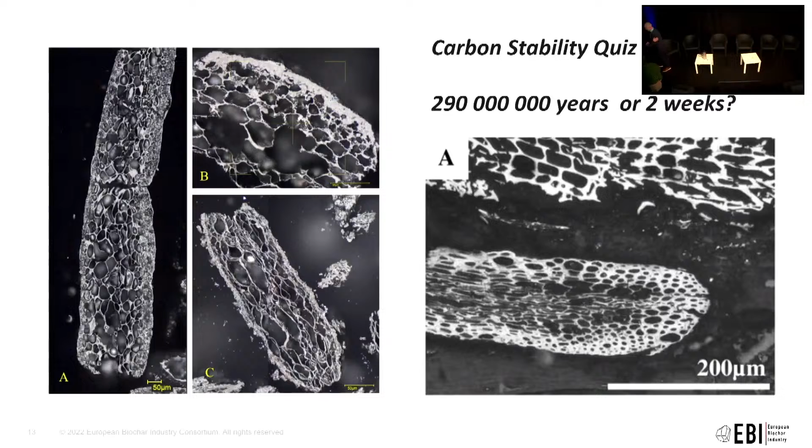Yeah, so I got a prize here. Thanks a lot for this encouraging presentation. We can scale, we have lots of synergies, and I think that's the part where it gets really interesting. Not only the production process and the product that we have, but also stating the persistence of this product, but then making use of it, like for example in soil remediation.

Drastically reducing the leaching of those toxic, difficult substances that we can also eliminate through the process of pyrolysis. So connecting the dots, that's what we will do also at our Congress in Helsingborg, of course. We don't have the time, we could only scratch the surface, but I hope that was a valuable input already.

Now, you don't see it anymore, but maybe you might remember. Which one was the oldest one, the left one or the one to the right? So if you want to raise your hands for the one to the left. Yeah, and the other ones for the right.

It's kind of equal, I mean many people don't seem to have an opinion, and actually I wouldn't say it matters too much, because we have the same structured material, and actually we're not using this technology, just having a microscopic view of it, but state-of-the-art technology that's used in geochemistry to analyze the differences or similarities, and it seems to be very interesting. So this is, generally for the biochar world, a great step.